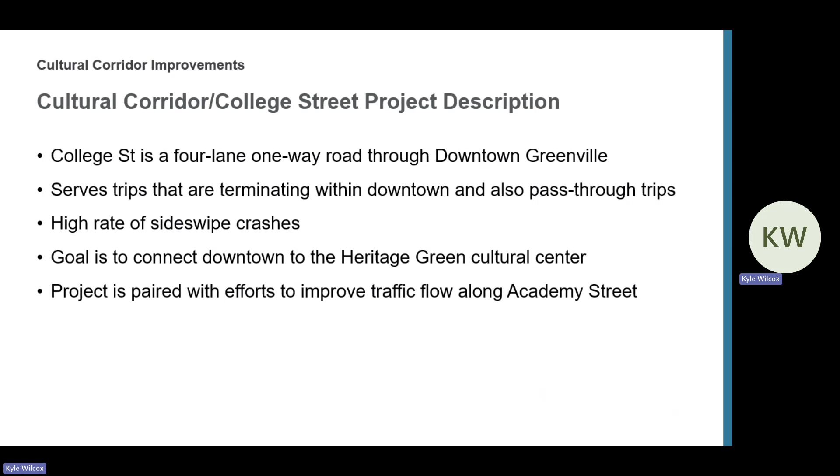So how do we use big data for this study? We went back to our OD analysis that we used for the 2019 master plan and looked at how people are moving through downtown, how they're traveling, and where they're coming from and going through.

So we can see here, if you're starting off to the west or east and heading west, about 56% of the traffic doing those kind of trips are utilizing College, and only 6% were utilizing Academy as pass-through trips. So what we wanted to do was figure out what we can do to make Academy Street more attractive to help with that diversion of traffic from College to Academy.

In order to do that, we were using our OD analysis as well as our microsimulation. I'll have Andrew talk about the microsim program we used for this.

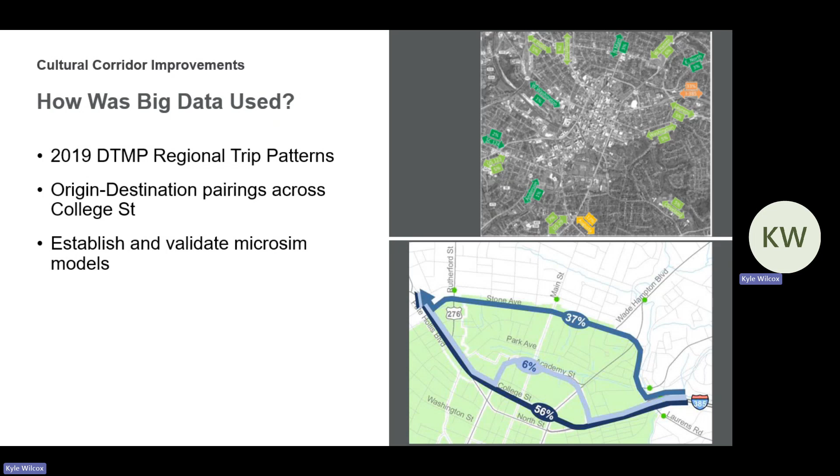Yeah, because big data, it's great. It'll tell you that a project might be feasible, but not whether it actually works. Too many times? No, we're good.

We wanted to use some microsimulation because it allowed us to find where traffic would end up routing to, and then also utilize its capabilities to figure out how we could improve that relocation onto Academy.

And so the program we decided on, over Vissim and over Aimsun, was TransModeler. Now, who here has ever heard of TransModeler as a microsim? Ooh, a lot more than I thought. Coming out of North Carolina, that's all we use.

I love its capabilities because it's got built-in OD development, which, when we tied that with the streetlight data, really made it an easy way to develop the origin destination matrices.

Then you've got the built-in dynamic traffic assignment, which allowed us, when we did that lane reduction, to really just reuse that OD matrix, but then see where the traffic ended up.

And the built-in signal optimization was really nice, because Vissim, it's great, but it's so hard to coordinate signals unless you're using something like Synchro or Vistro. So this gave us an all-in-one model to really create an efficient way to look and see where traffic might reroute.

And so we included all of the downtown core, as you can see here on the right side of the screen, which allowed us to assess where people might go, whether it's Academy or down to Washington on the southern side or anywhere in between.

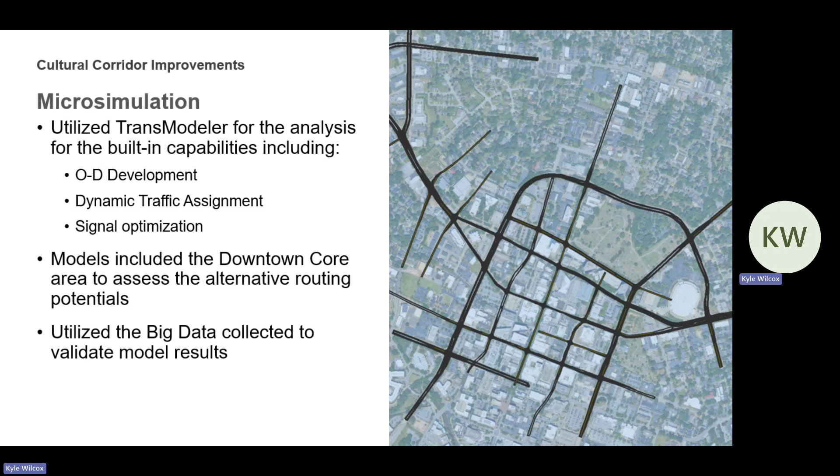And that big data that we collected initially was then able to be reused to validate what we were seeing. So the microsimulation we did, we really wanted to answer three questions.

What are the impacts of the project when we did it? Could we make Academy Street more desirable? And then what improvements may be required to really keep traffic moving?

So we did a lot of the microsim work, starting with quick things like deleting the lane and making small tweaks to signal timings, and then moving to larger improvements like adding extra lanes, lengthening turn lanes, or just changing the paint striping.

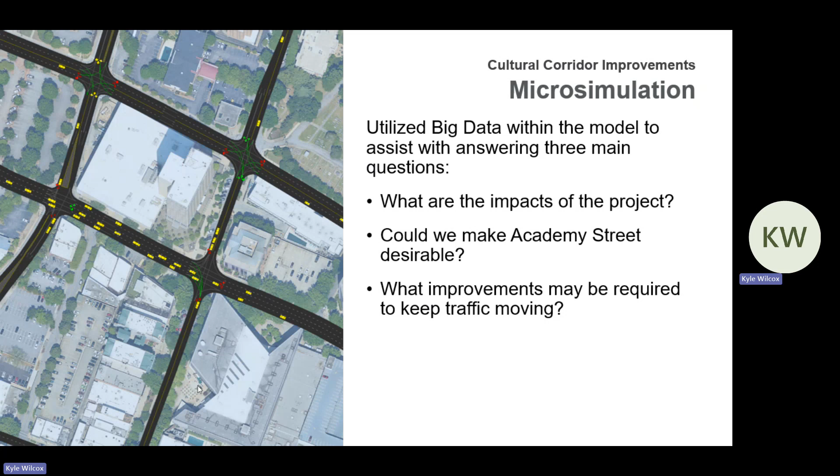And so what we ended up finding was that there's 4 really easy low-hanging fruit opportunities to improve Academy Street and really start getting that traffic to shift and not really experience too much extra travel time. So starting on the right side here, and we'll work counterclockwise. So coming into the town, there was just a single right turn lane onto Academy. And so that was an easy low-hanging fruit where we could add in a shared right turn, and suddenly we increased that capacity even more.

And we extended the left turn lane then at the next intersection because we were seeing some queuing going on that then impeded the through traffic being able to keep going around in a bypass fashion. So extending some of those really then helped things. And then retiming just that corridor and making it actually coordinated along Academy Street for a change really then pushed traffic through really well so that we could get them up and around and reconnect with North Street, College Street

on the other side. And then there was another signal on the far west side of town that just wasn't really warranted anymore. So we made that recommendation to pull them out. And all of this really isn't too big of a set of projects to where it's now already in place as the construction work is going on. And so with that,

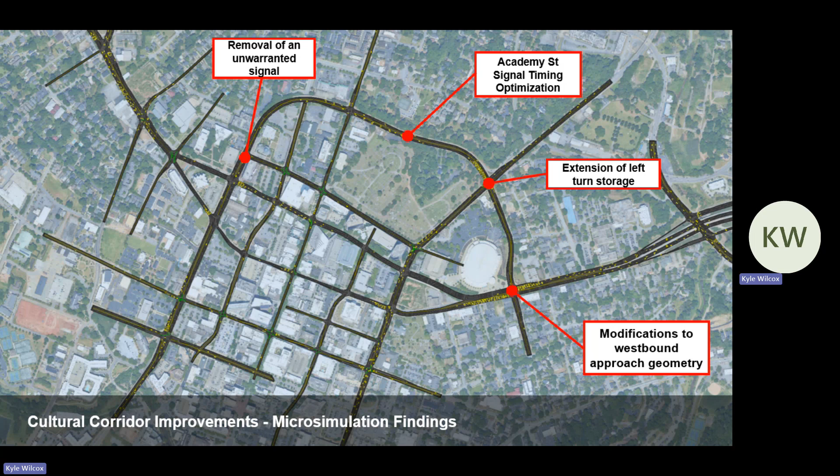So, as Andrew mentioned, and as we've already talked about, the project is under construction and it's expected to be completed this year. And again, those other projects along Academy Street that Andrew mentioned were kind of more rapid response type projects. They were smaller in scale. But they have been implemented and were implemented prior to breaking ground on the cultural corridor project itself, so that there was a viable bypass ready and available during MOT conditions for the main project.

Project will also make upgrades to other elements, so it's not just adding additional landscaping and sidewalk and pedestrian space. It's also upgrading traffic signals. The signal right here has been modified. The 2 other signals along the route are being completely rebuilt, so there'll be brand new infrastructure there. There'll be new fiber optic communications between those signals to help the city grow their network.

And kind of a parallel to this, and prior to Academy Street's signal retiming, we had to really establish more coordination and more communication on that corridor. So the city worked in partnership with SCDOT to add wireless radio communications and expand their downtown grid networks. That had to be done prior to any kind of retiming. I think the city's TMC has also been very instrumental in being able to maintain and keep timing plans on Academy Street functioning.

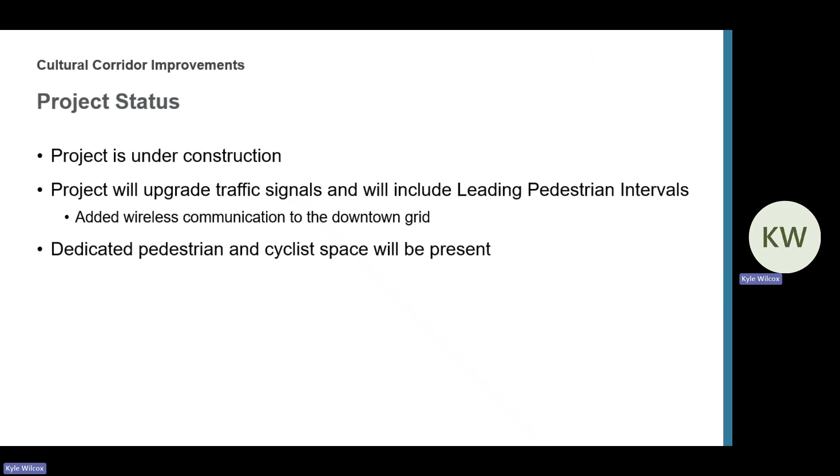It really kind of brings the city's vision for downtown, which is slower streets, promoting business, promoting walkability, all the things that people know and love Greenville for. It's bringing this one block further north and helping expand that and turn what College Street used to be into something that's more aligned with what the city has in plan.

There are a lot of reported near miss crashes and actual crashes happening. And there's also congestion. It's a heavily traveled road. So there's a lot of features and a lot of elements that are at play here, even down to the characteristics of the road itself. And so what the city and HDR were looking at with Stone Avenue are focusing on safety improvement. So how can we make the intersections that are already there safer?

It is a constrained corridor. There's not a lot of room to expand and widen and even build turn lanes. It's very challenging in that corridor to build anything outside of the existing roadway footprint. So we were trying to identify opportunities to improve the corridor without completely rebuilding.

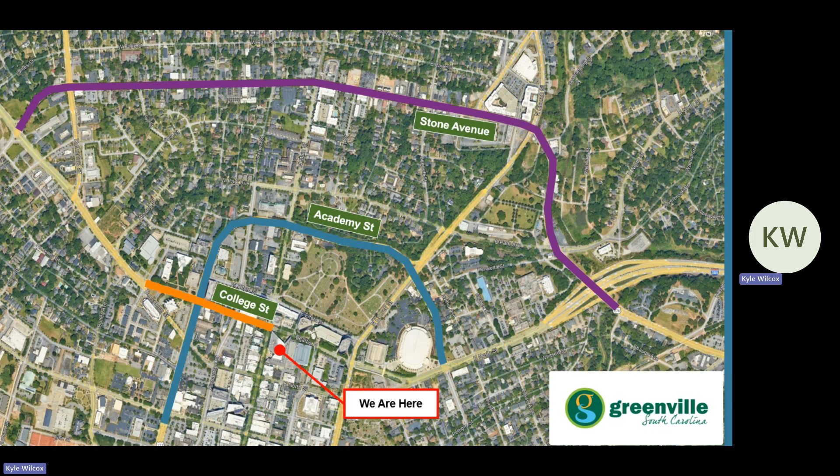It is a 4-lane undivided route on US 276, and it is undivided for most of its stretch. There are some left turn lanes, especially as you get over towards 385. It does widen out, and you do have some left turn lanes at certain intersections and locations there.

But along the denser area that's growing and developing and changing, there are numerous driveways without any left turn capability. So you're making a left turn from a through lane to a driveway, and you sometimes are having to do that with an opposing person turning left as well. And that can lead to issues where there's lockups because you can't see past the other car who's waiting to turn left. People get impatient. People start making risky moves, and that leads to those near misses and those crashes that were being reported.

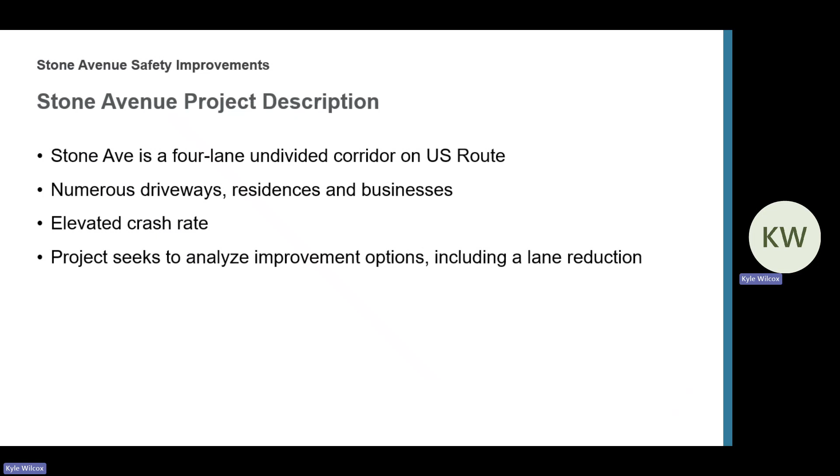We did eventually, through our analysis, identify that there was an elevated crash rate for the corridor. And as I mentioned, we looked at improvement options, including a lane reduction. That's important. It's a 4-lane road. One of the sometimes obvious solutions for this is to take a 4-lane road that's undivided and remove a lane or two and make it a 2-lane road with a center median. And that was one of the things that we were going to be examining with this project.

So again, we went back to StreetLight because we had success with it in the downtown master plan and the cultural corridor project. And if you don't know what StreetLight data is, it is really just a data analytics platform, subscription-based, and it uses cell phone data and other freight data to aggregate massive amounts of information into condensed visualization tools. So you can really start to get information about trips via time of day, time of year, day of the week, directionality.

And so what we were able to do with this is we had a couple of key things that we were looking at. We were looking at a middle filter analysis. We were looking at origin-destination regional trips. And then we were also wanting to establish generalized origin-destination pairs for the building of the microsimulation model, which Andrew will talk about.

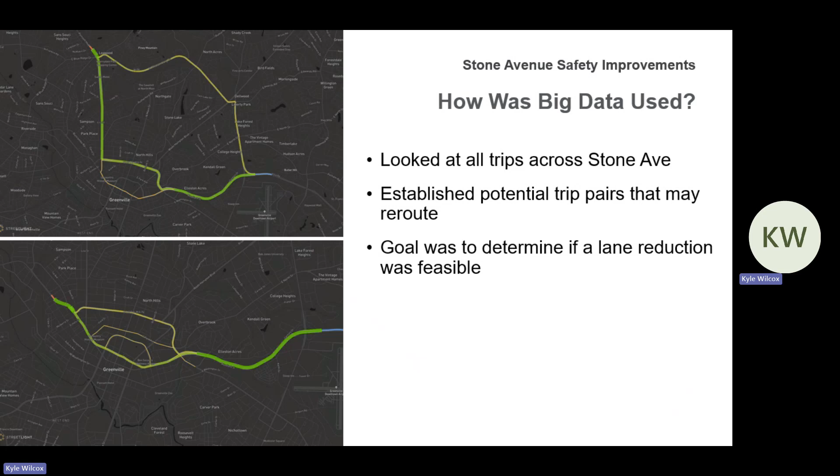This is a similar example, but it's a different trip pair. This is Pete Hollis Boulevard, more to the general west of downtown, to 385. And what you see here is people are actually using College Street more often. There's less people using Stone. So we're starting to get a picture of where within the city are people going? How are they using Stone?

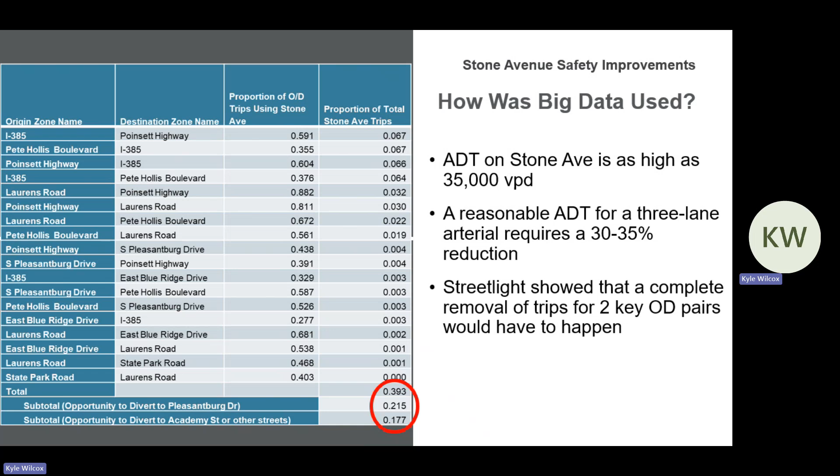So we went back in and pulled out the same stuff we were doing for Academy Street. We thought, okay, let's really try to see if TransModeler can get us to that point, because there was a chance, even if it was slim, that we could make this work if we could make some of these other routes attractive. So we pulled out our Academy Street model where we had the downtown and grew it out to really explore all of North Greenville here.

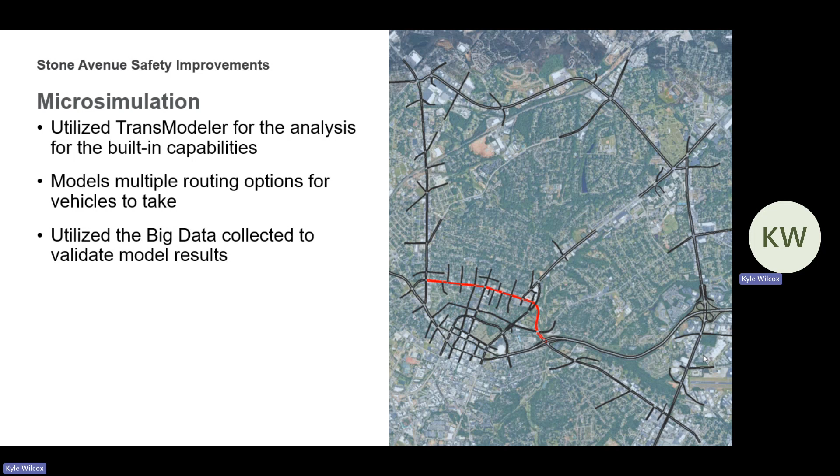And so when we did that, we looked at pretty much the same three questions: what are the impacts if we do this? Are the other routes at all desirable? Because we also had Academy Street here and the College Street work going on at the same time, where we didn't want to blow this area up by fixing Stone Avenue too, and just shifting the problem back to downtown, which was already a problem. So we really needed that outer loop of Pleasantburg Road to be the attractive route.

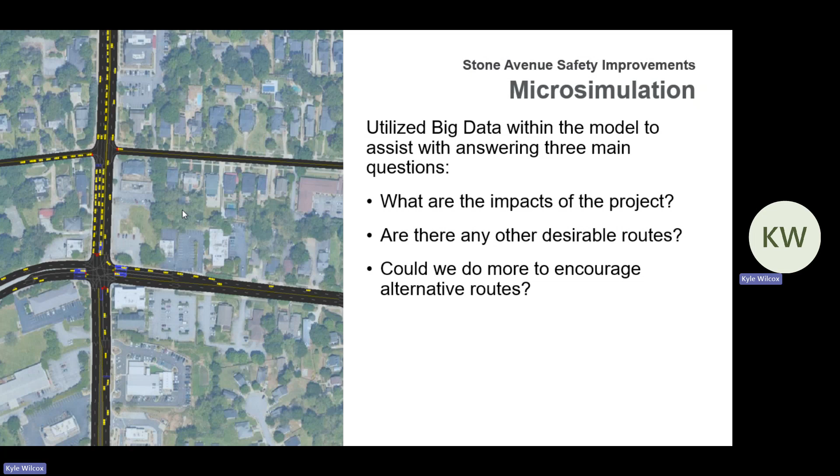And so we started running the models, and nobody moved. They were willing to sit through that congestion rather than relocate to Pleasantburg, which is congested, but it's not Stone Avenue congested when we take away a lane. And so we had to start re-looking at it because this was our findings. There's nothing.

Uh-oh, what did I push? Aha, good.

At the end of the day, what we were finding is this big desert in the middle was our problem. There isn't a great network that brought us through here. But we still actually wanted to improve stuff along Stone because, as you heard, there's safety issues here. And so that's when we reused that model, even though it wasn't working to show us that we could divert and actually do that lane reduction.

We started looking at ways to actually make it work without impacting traffic. And so that's when we started looking at, okay, let's look at left turn lanes. Can we remove some of those and keep people from turning left into some of those businesses, and reuse some of the internal network nearby to get people to divert and come back around? And so that's when we did some internal modeling there and started seeing, okay, there is potential here.

We could actually do some safety improvements and keep traffic flowing, because Stone Avenue is regionally significant, but we also want to make sure the locals have an enjoyable time and a safe time. So, Brian, what did you find?

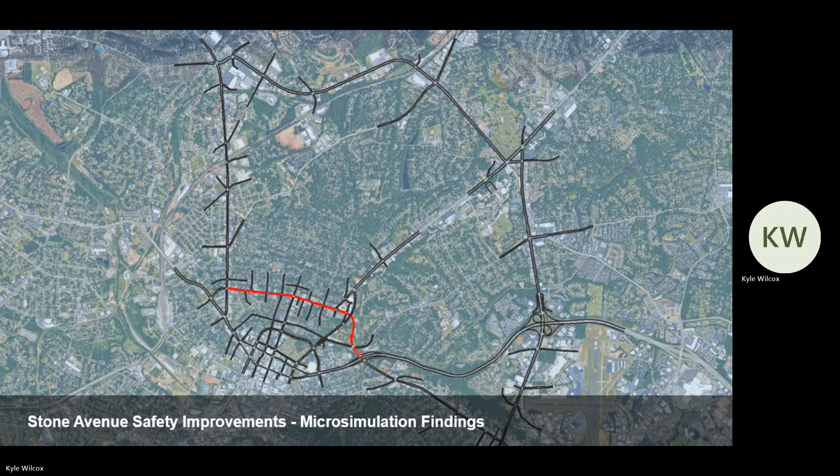Yeah, so in parallel to the traffic analysis, HDR, the city, and South Carolina DOT District 3 were conducting a road safety audit along the road too. So a lot of the recommendations presented at the conclusion of the study have to do with the road safety audit itself. We're talking about things like improving and increasing no right turns on red, perhaps time of day restrictions on left turn functionality at traffic signals to help reduce the left turn lockup that's been reported.

Converting some of the protected-permitted left turn phases to protected only. There's an existing mid-block crosswalk used by school children that had a flashing beacon, but it wasn't actuated. It was just a continuously flashing beacon with some warning signs that would be upgraded to a pedestrian hybrid beacon. Some much needed improvement. The community was really interested in that. And then there are some additional capacity adjustments to some of the key intersections.

I think the key safety motivator that we're looking at now is we don't think that a lane reduction is viable. We don't want to push traffic to the next block to the north, which is a residential street. We don't want to push traffic to the next block south, which is Park Avenue, which is also residential. It's already a cut through today for some people, and we did not want to make that worse.

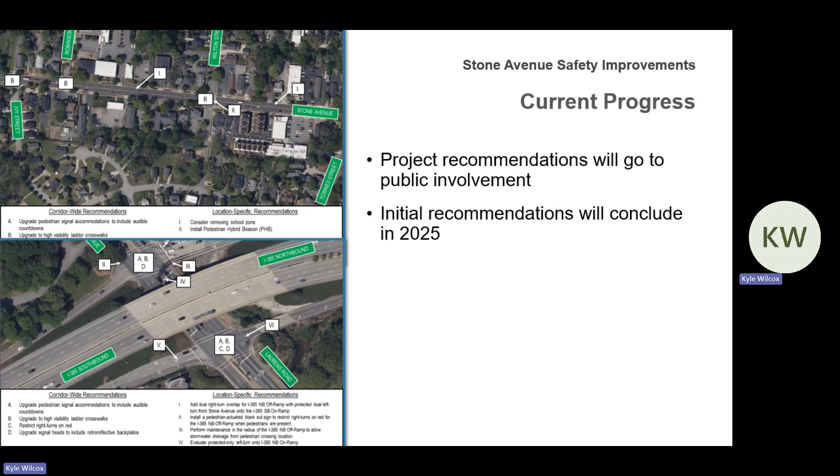So we've walked through two projects that we've worked on in Greenville, but what can we take away from these projects? What are some of the conclusions we can glean? One is the use of big data in a planning level review of these projects. In both cases, we were able to look at the OD data from StreetLight and see, in the case of College Street, that a lane reduction is a viable option because of the amount of traffic utilizing that roadway. But for Stone, because of its regional significance, we could see that was going to be more of an uphill task.

So even before we get into any kind of microsimulation or analysis, we can look at a high level with big data at the planning components and whether it's even a viable or feasible option. And then when we do get into the microsimulation, we can really focus our efforts. With the OD data, we knew what the routes were and what they weren't, so we could model those routes instead of modeling everything. We could be more selective, which can lead to more efficiency with the modeling, as well as some cost savings.

And between the two, we had two very different conclusions, even though we went through the same process and methodology and used the same kind of information. It really came down to the location of these roadways, what their significance was to Greenville, and who used them. Again, with College Street, we saw where we could use a bypass with Academy Street. We were able to take trips off of College and move them.

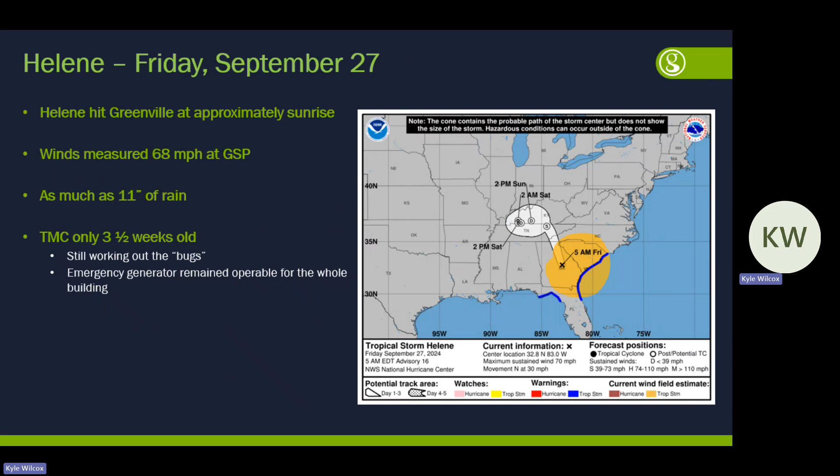So the storm passed about noon, sun came out, and I'm standing there at the office thinking this can't be real. Just a few hours ago, it was horrible. It was absolutely horrible. I think Greenville, the upstate, took the brunt of the wind. Unfortunately, as we all know, Asheville and Western North Carolina got the water. And I just can't imagine the devastation that they encountered up there. So I think we kind of got off a little bit better. So if we could just remember our friends in North Carolina.

So again, we had in our inventory 18 portable generators. And that is part of our emergency response. Generally speaking, when a signal goes out, we are asked to deploy a generator. I know, apologies to Ben, DOT generally doesn't like it, but the expectation of leadership and management is that our signal system is always working. We have battery backup throughout the city. However, it's only rated to run about 3 hours, and we were without power at most of our signals for about a week. So we had to do something.

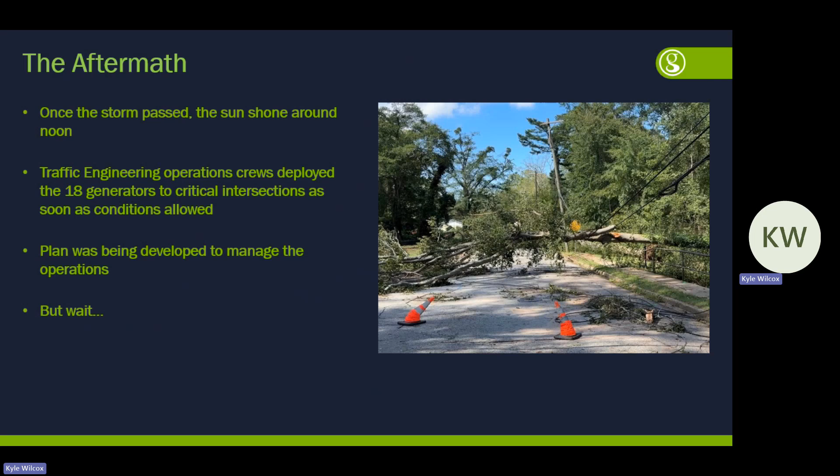So we had developed a plan: which intersections are we going to send these 18 generators to? And for anyone who's ever done that, that's a lot of generators to manage. Again, our signal system being over 200 signals, we had to pick the most critical ones. But wait.

Saturday morning, the 28th, after the storm had passed, I had gotten word that our city manager and the fire chief were able to procure another 50 generators. Hence the wait, what? Which was my reaction when my boss told me that we were getting another 50 generators. So that really kicked everything into high gear as far as the traffic engineering staff. How are we going to manage 68 generators around town? It really was an unbelievable feat. And I have to give credit to my crews because everyone stepped up. Not that they really had a choice.

So that day, because there were so many power outages citywide, there was really no way for us to tell, without actually getting out into the field and looking at it, how many signals were operable. And in a twist of irony, Helene really didn't affect the CBD all that much, but the microburst did. So we were in pretty bad shape citywide. We did determine that about 67% of our signals were without power. And as you can see here, we had one intersection that was actually destroyed completely. Old growth trees had just fallen and taken the signal down.

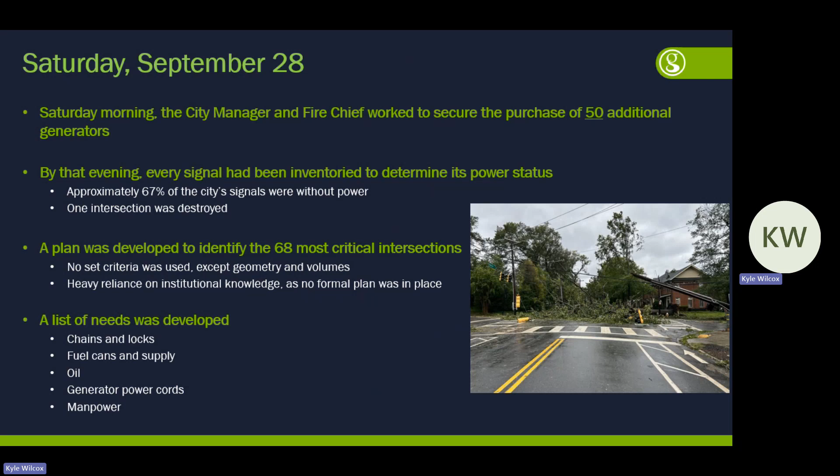So by Sunday, it was all hands on deck. My guys plus the entire engineering department with the city. We came down to about 8 teams with 3 to 4 people each.

So the generators arrived around 10 o'clock Sunday night, and everyone was there ready to unbox. We had our cords. The power cords were 3-wire, 14 gauge, and just because the power was out, we could disconnect Duke Power and put it in on the terminal block. Just wired in. Fortunately, we had a master electrician also on staff who helped us out with that. So anyway, now we're into Monday.

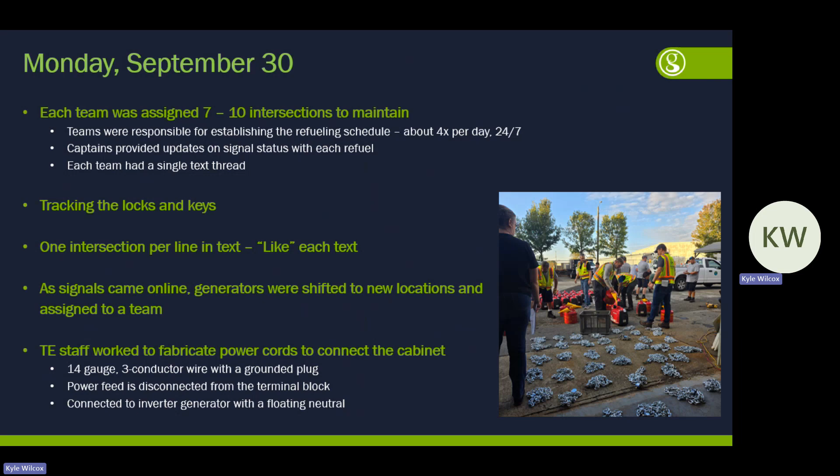So it's basically a game of whack-a-mole is what we were playing with all these generators, moving them all around town, trying to make sure that as many as 68 were operational. So yes, okay.

Refueling: a 5-gallon gas can is not going to last you very long when you have like 7 to 10 generators. So county EOC, fire department, they had a 50-gallon fuel truck with a big tank on the back that they were gracious enough to loan us. So we had that truck at traffic engineering.

The county EOC had a centralized refueling station, and I had one person whose job was to make sure that gas truck was always full. And we didn't make people come in to use the gas truck. Said, if it's easier just to go to a gas station and they have gas, fill your gas cans up at a gas station, just save the receipts.

I say this because I still have not deleted this text thread. I don't save texts. It's just how I operate. I have not yet deleted this because I keep referring back to it for some reason or another. So hold on to the texts. Heavy use of OneNote and Excel. OneNote makes it very easy just to move from one column to another. Excel, great for filtering when you need to.

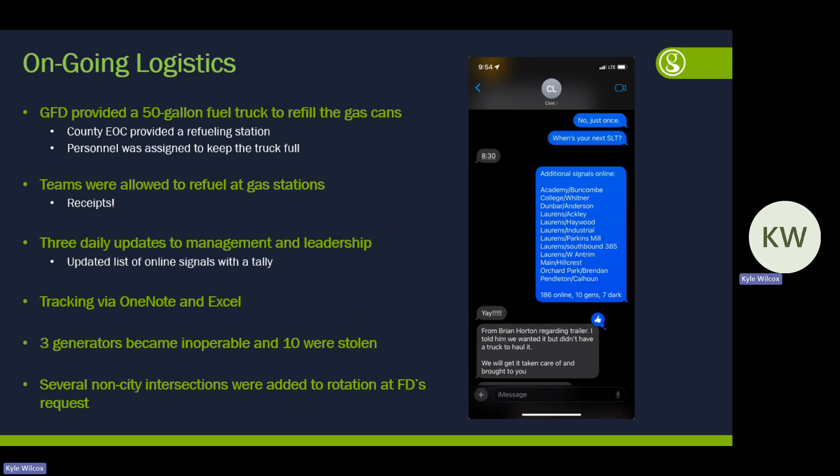6 intersections surrounding Cherrydale, and 1 intersection out that fortunately we didn't have to really worry about. But those were DOT-owned intersections. And again, apologies to DOT. We had to get them up and running because they were highly trafficked routes, and we had to get the signals running. So we had those 6 added to our rotation, which is way, way out there.

The lone holdout was on a corridor, Haywood Road, that had been working except for one location. We couldn't figure out why, so we put in a call to Duke Energy saying our signal is dark, it's not working. They would go out, look at it turning red, yellow, green, and assume it must be working because it was on a generator. They didn't get out of the car to look that a tree had actually fallen on the power line and wasn't feeding power to the meter. They just saw the light changing, so they assumed power must be there. We probably could have had 100% by the 6th or 7th, but - get out of your truck and look, please.

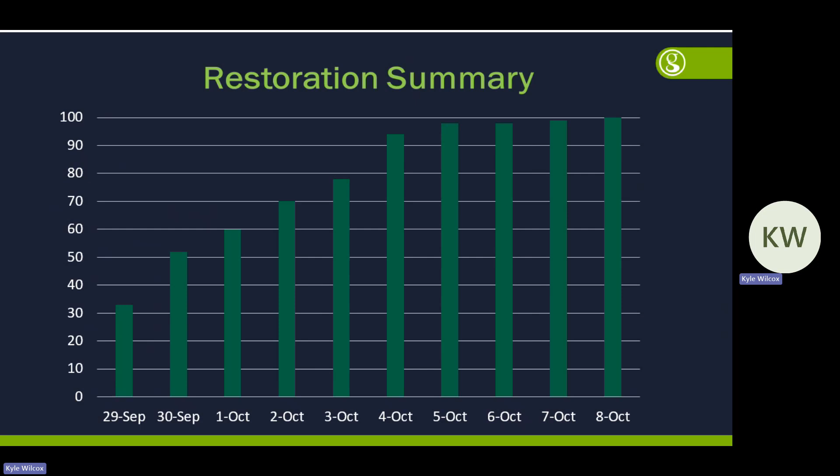In any case, lessons learned. Like I said, we never expected anything like this, so have a plan in place. We ended up prioritizing, applying criteria: what are our major corridors, what are our routes to important infrastructure like hospitals, schools, things like that.

One thing we did not do, and this was on me, was take the time to record the serial numbers of the generators. I was expecting a bill of lading or shipping slip with the delivery since they were delivered directly to traffic engineering, but that didn't happen. They just showed up, 50 generators were offloaded, and they left. That's just how it happened. Our singular focus was getting those generators unboxed, gassed, oiled, started, and deployed - nobody was thinking about serial numbers.